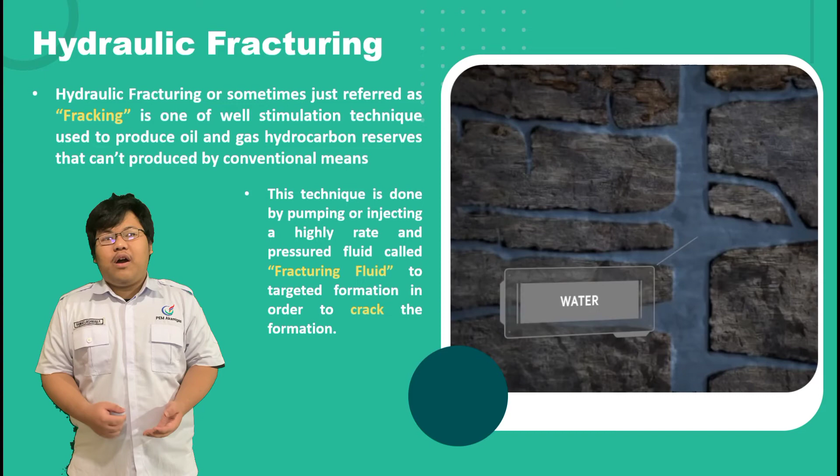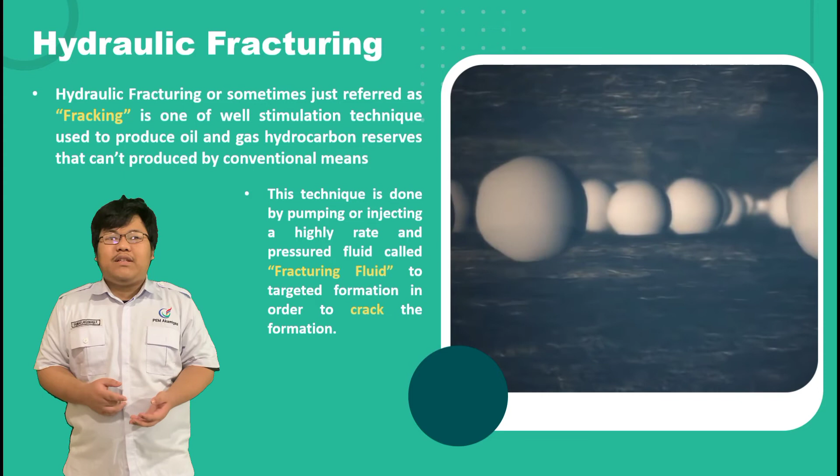So, what is hydraulic fracturing? Hydraulic fracturing, or sometimes just referred to as fracking, is a well stimulation technique used to produce oil and gas hydrocarbon reserves that cannot be produced by conventional means. This technique is done by pumping or injecting a high rate and pressure fluid called fracturing fluid into the target formation in order to crack the formation.

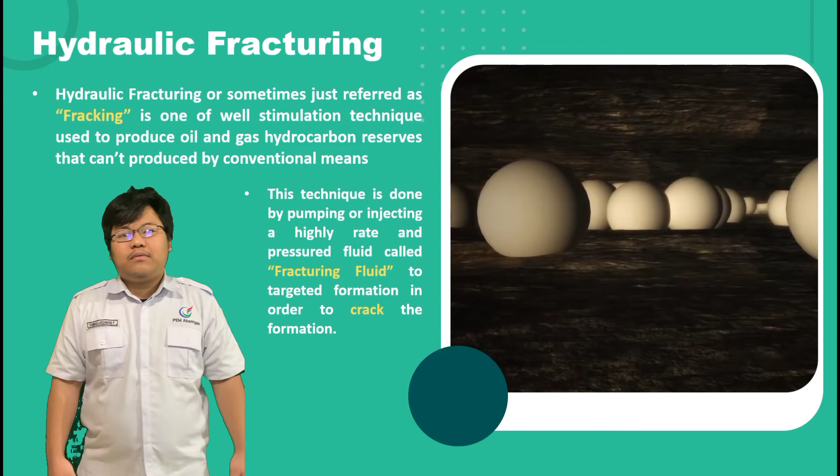The method of fracking has been around since 1862, the American Civil War era, credited to Colonel Edward A. L. Roberts. At this time, fracking was done by inserting explosives into the borehole, making a blast that cracked the formation. In 1935, more than half a century later, the idea of replacing explosives with a high pressure injection of a fluid, hence the name hydraulic, emerged.

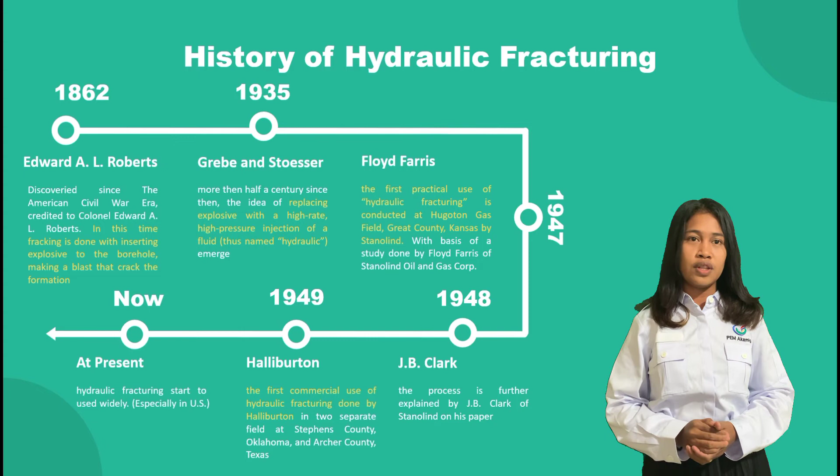In 1947, the first practical use of hydraulic fracturing was conducted at Hugoton Gas Field, Grant County, Kansas by Stanolind, based on a study done by Floyd Farris of Stanolind Oil and Gas Corp. In 1948, the process was further explained by J.B. Clark of Stanolind in his paper. In 1949, the first commercial use of hydraulic fracturing was done by Halliburton in separate fields at Stephens County, Oklahoma and Archer County, Texas. Since then, hydraulic fracturing started to be used widely, especially in the US.

There are several reasons why hydraulic fracturing is preferred by many people in industry. The first reason is petroleum-based energy demand. The world demand for energy has increased exponentially in the past and is expected to continue increasing for the foreseeable future. This is triggered primarily by population growth and higher standards of living around the world, especially in the developing world where most of the population lives. And although there is other, non-fossil energy, many people still prefer fossil fuel, especially in developing countries.

To fulfill this increasing demand for oil and gas, many methods of increasing production rate emerged, such as hydraulic fracturing. In their natural state, most oil and gas wells do not produce at their optimum level, but hydraulic fracturing can address multiple challenges to efficient production, thus improving the production rate. Production rate performance will eventually decline to a level below which production is not economically advisable. Hydraulic fracturing increases the ultimate recovery factor that corresponds to the economic cutoff of production.

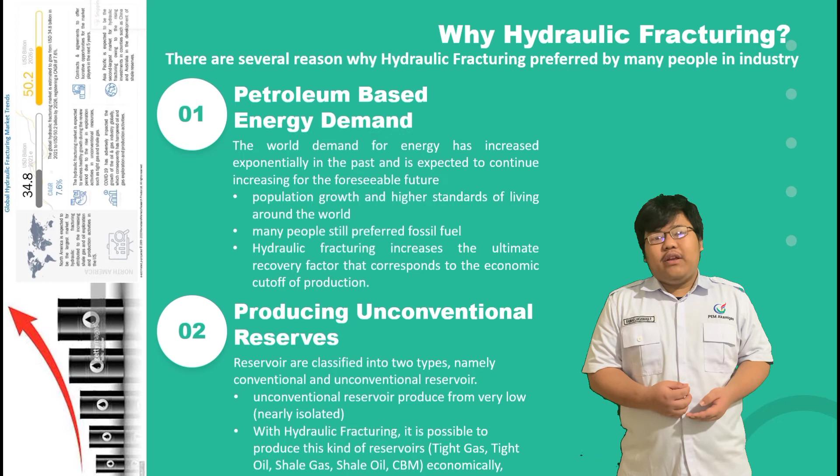As we explained earlier, hydraulic fracturing is done by injecting a high rate and pressure fluid to fracture the formation in a wellbore. This causes initiation and extension of a hydraulic fracture, changing the flow regime and permeability, thus increasing the production rate of the well. The pressure required for fracture initiation depends on: first, the three in situ principal stresses, namely vertical stress, minimum horizontal stress, and maximum horizontal stress; second, formation mechanical properties; and last, the formation tensile strength.

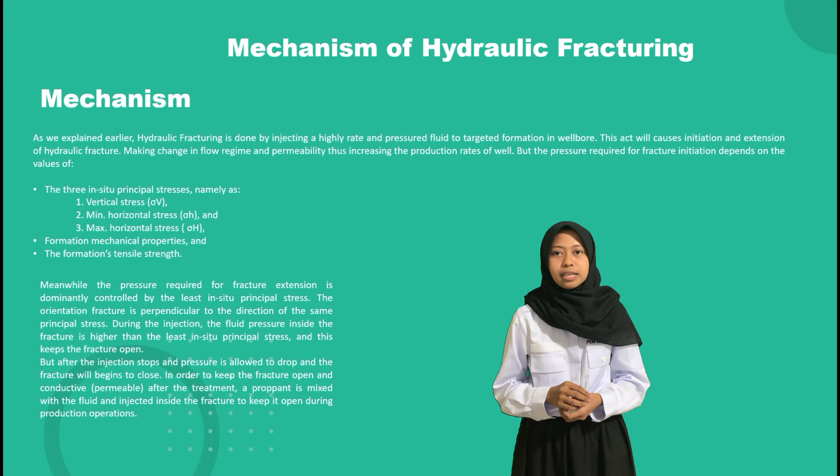Meanwhile, the pressure required for fracture extension is dominantly controlled by the least in situ principal stress. The fracture orientation is perpendicular to the direction of that principal stress. During the injection, the fluid pressure inside the fracture is higher than the least in situ principal stress, and this keeps the fracture open. But after the injection stops and the pressure is allowed to drop, the fracture will begin to close. In order to keep the fracture open and permeable after the treatment, a proppant is mixed with the fluid and injected inside the fracture to keep it open during production operations.

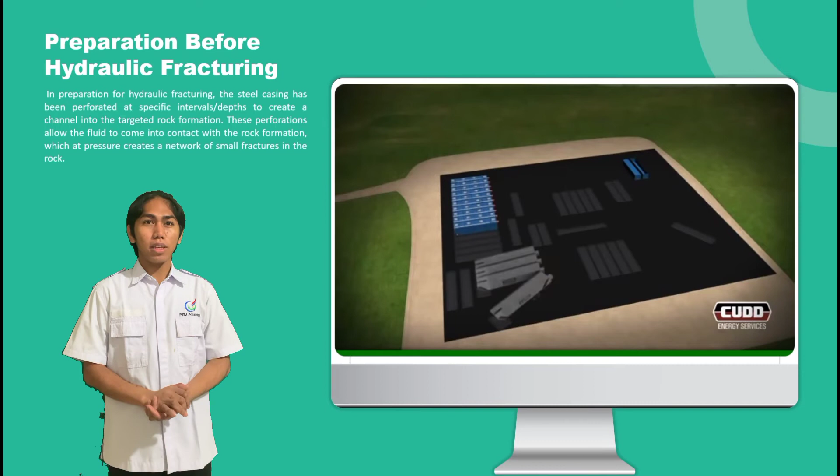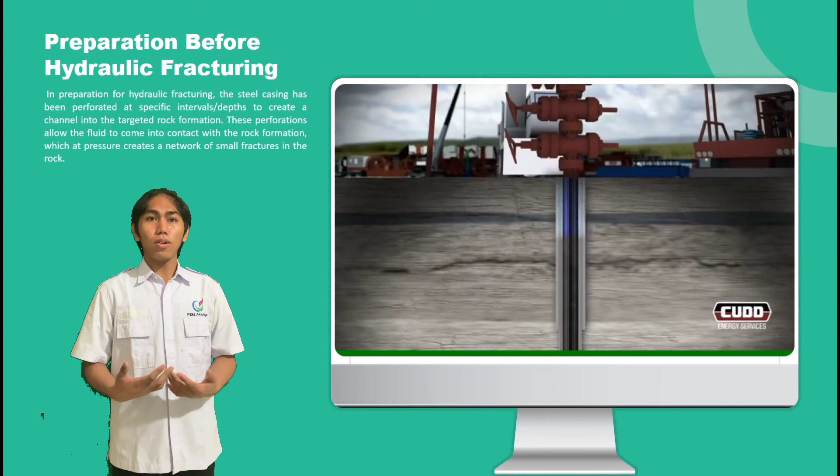After completing the well, the fracturing job consists of several sequenced procedures. This sequence can vary in each well, where each has its own particular formation conditions, but the process is essentially the same. This also includes the specific blend of fracturing fluid used for each specific formation.

The first step is the pre-pad or acid stage, consisting of a mixture of low to mid-strength acid and water. It serves to clear cement and debris in the wellbore and provide an open conduit for other fracking fluid, by dissolving carbonate minerals and opening fractures near the wellbore.

Second step, the pad stage, consisting of slick water, a mixture of water and viscosifier or friction reducer, usually polymer, without proppant material. It serves to open the formation and helps facilitate the flow and placement of proppant material.

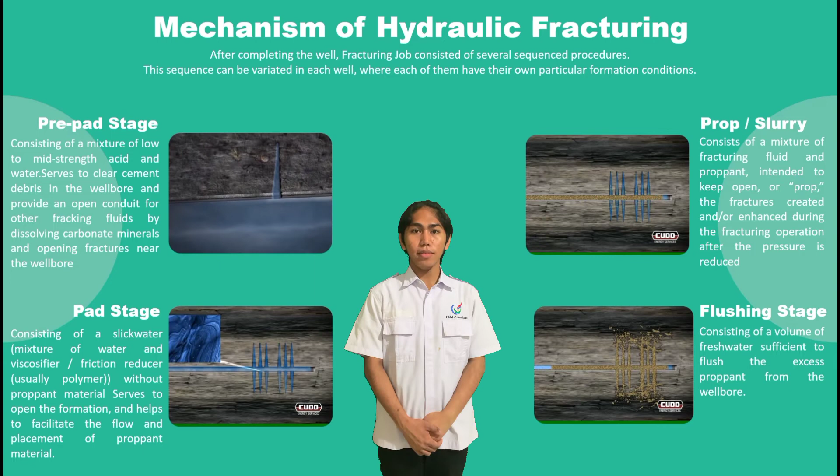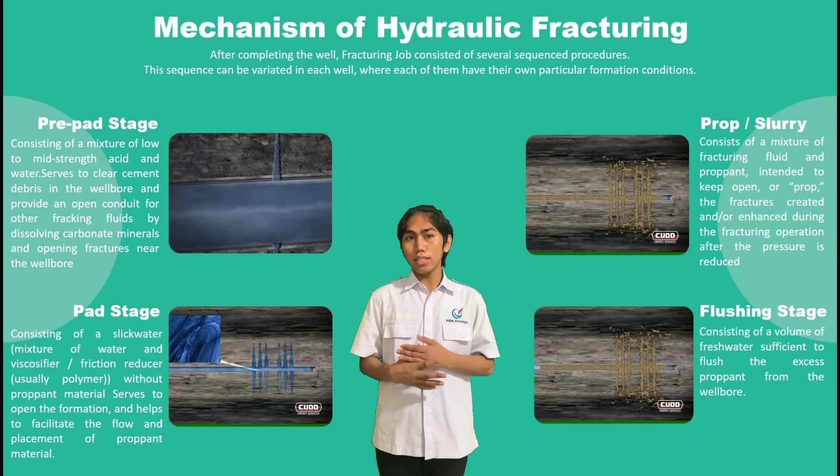Third, the prop or slurry sequence stage, consists of a mixture of fracturing fluid and proppant, intended to keep open or prop the fractures created or enhanced during the fracturing operation after the pressure is reduced. Fourth, the flushing stage, consisting of a volume of fresh water sufficient to flush the excess proppant from the wellbore.

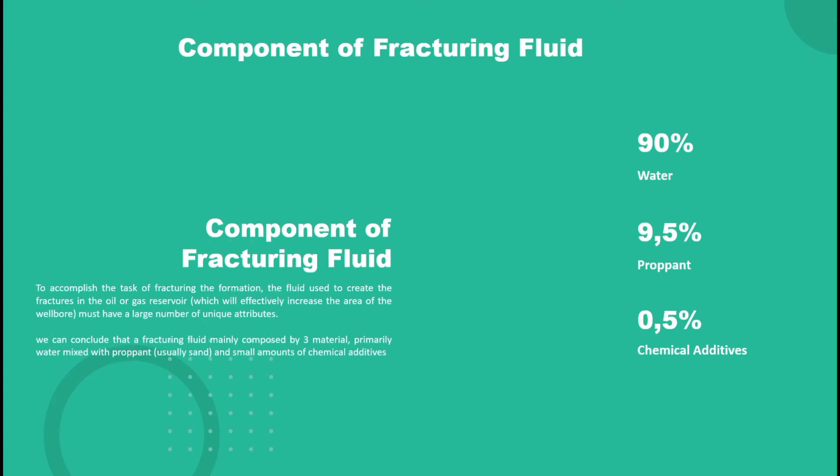To accomplish the task of fracturing the formation, the fluid used to create the fracture in the oil and gas reservoir, which will effectively increase the area of the wellbore, must have a large number of unique attributes. This requires a true understanding of the complete rheological properties of the mixture of chemical compounds which make up the fracture fluid and its proppants, designed to create a network of fractures extending away from the wellbore and interlaced with the natural fracture system of the shale reservoir.

Fracturing material consists of two main components, fluid and proppant, where the fluid commonly is a mixture of water and additives. So we can conclude that a fracturing fluid is mainly composed of three materials: primarily water, mixed with proppant, usually sand, and a small amount of chemical additives. Although the exact percentage of the mixture will not be the same in each well because of the unique characteristics of its formation, the essential blend can be written as 90% water, 9.5% proppant, and 0.5% chemical additives.

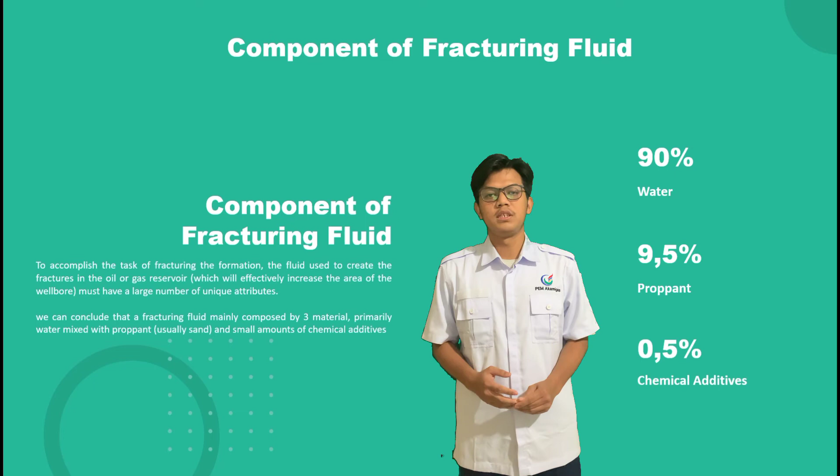Common additives used are viscosifiers or gelling agents, used to increase fluid viscosity to help transport the proppant inside the fracture, for example polymers like guar gum, hydroxyethyl cellulose, or HEC. The next is friction reducer, used to reduce tubular friction and subsequently reduce the pressure needed to pump fluid into the wellbore, for example polyacrylamide-based compounds.

The next additive is breakers, used to break the fluid and reduce its viscosity after the treatment so it can flow back and allow cleanup of the proppant pack, for example oxidizers, acids, etc. The next is clay stabilizer, used to prevent the water from interacting with reservoir mineralogy and eliminate damage from swelling clay that may exist in the formation, such as potassium chloride, sodium chloride, aluminium chloride, etc.

The next additive is surfactant or mutual solvent, used to reduce the surface tension of fracturing fluid to improve fluid recovery and compatibility between the fracture fluid and the formation matrix or formation fluid. The next is cross-linker, used to increase the molecular weight of the polymer by cross-linking the polymer backbone into a 3D structure and increase the elasticity and proppant transport capability of the fluid, for example boron, titanium, zirconium.